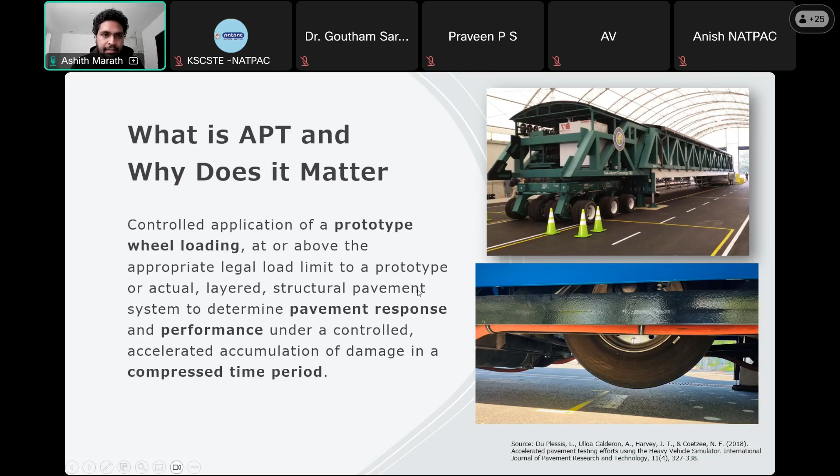Why does APT matter? The main advantage of using APT is to validate new materials or designs before recommending them for widespread use, and to help understand why certain pavements fail prematurely, and improve specifications and construction practices. I included construction practices because doing APT facilities requires going through all the steps of constructing a typical highway or pavement section, including plant production. That helped us, especially in my experience, identify challenges in plant production, especially when using new materials. That was really a helpful process that comes as part of the APT testing plan.

And finally, an APT facility lets us understand the pavement's mechanical behavior, and eventually improve the pavement prediction models.

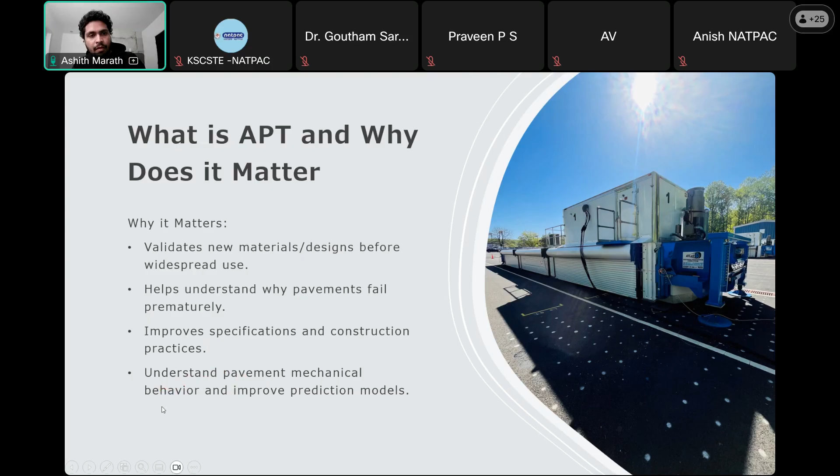So now I'll go through each of the features I mentioned, one by one. First, let's move to understanding the role of APT in understanding pavement mechanics.

At the Turner-Fairbank Research Center, one of our main focuses is to evaluate pavement mechanics with the help of multiple kinds of sensors embedded in the pavement. In our case, we have 11 test sections, each with 4 different test sites, so combined there are 44 test sites. All 11 lanes are embedded with almost 300 to 350 sensors, including pressure cells and strain gauges. I'll explain that in the coming slide.

With all these responses from these sensors, we are trying to capture the variation in stresses and strains under different wheel loading and configurations, pavement temperature, wheel load, pressure, and speed, all these different configurations.

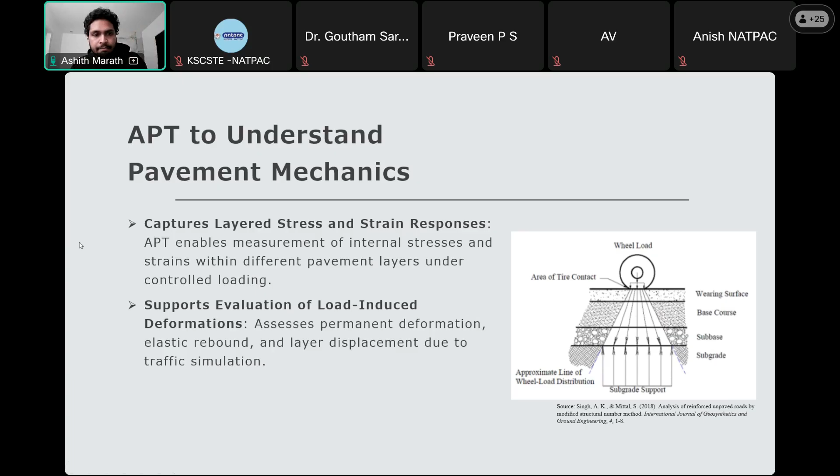This also supports evaluation of load-induced deformations, especially in understanding or measuring the progress of rutting or cracking phenomena. So we continuously evaluate that to understand how cracking or rutting is propagating in the pavements, enabling monitoring of fatigue and rutting mechanisms.

This is one of the main ideas of our current project: to investigate the propagation, mainly focusing on fatigue cracking propagation, looking at the initiation and different stages of the cracking.

This APT facility also facilitates validation of structural response models. For mechanistic-empirical pavement design in the US, we use linear elastic analysis as the basic pavement response model, except for some design software such as ILLI-PAVE and FlexPAVE. Pavement ME, which is the most widely used software, uses linear elastic analysis. So we use our recorded pavement responses to validate these linear elastic or finite element analyses, to validate the prediction accuracy of these models.

I've shown a small example from one of our test results, one of our sensor results. Out of 11 test lanes, two of them are inverted pavements. For those not familiar, an inverted pavement is basically a conventional asphalt pavement structure with a sub-base layer constituted of a cement treated base.

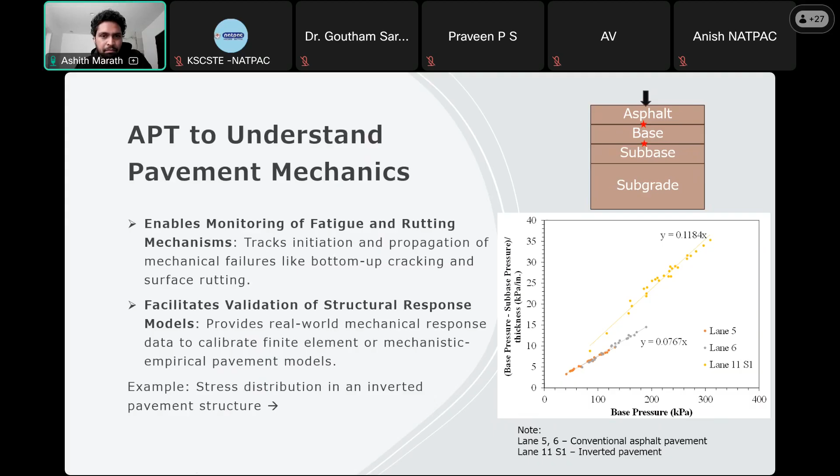Moving on further, another application of the APT is to calibrate pavement design models, mainly for the PMED. PMED stands for Pavement Mechanistic Empirical Design. The general process I will classify as 5 steps. First one is to run APT tests on instrumented sections.

Second step is to characterize materials in the lab. Third step is to use mechanistic empirical software such as CalME, MEPDG via AASHTOWare to predict performance using lab data and compare predictions to APT measurements such as rutting, cracking, deflection and strains, and adjust the model calibration factors—that is, the transfer function—until prediction matches the measurements.

For example, the California DOT has developed their own rutting and fatigue models which are more suitable for the California region. I'll talk a little bit about transfer functions, for those who are not familiar with what those functions are.

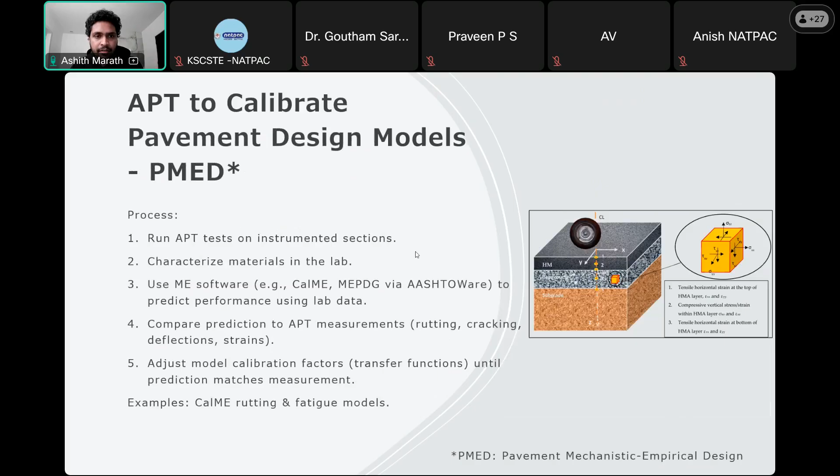This is a very simple, basic structure of the pavement mechanistic empirical pavement design. These are the steps: first you characterize the pavement materials in the lab. By characterization, I mean measuring the mechanical properties of the mixture—not necessarily index tests such as IDEAL-CT, which are index-based tests. Instead, one example is the dynamic modulus, which is a fundamental property of an asphalt mixture widely used in the pavement mechanistic empirical design approach.

Once you characterize the materials, you use a pavement response model, which could be linear elastic analysis. In India, we use IITPave, which runs on a linear elastic analysis program. It could also be a finite element analysis program. The output from the pavement response model is the stresses and strains within the pavement structure. As pavement engineers, we focus on critical locations—the strain at the bottom of the asphalt layer, and the vertical strain at the surface of the subgrade layer.

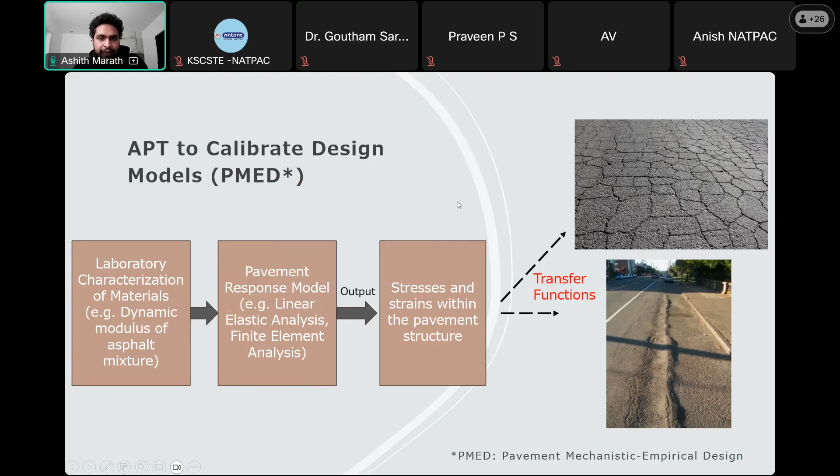This part of the PMED is the empirical part, while the response model and determination of stresses and strains is the mechanistic part of the design. With that in mind, let's move on to another application of APT, which is to develop correlation between index-based tests and pavement performance.

The APT correlates lab index properties to in-situ behavior. It uses APT to evaluate how index tests reflect the mechanical performance of subgrade, base, and surface layers, and enhances the reliability of material selection—confirming whether lab tested parameters like CBR or resilient modulus align with field responses under loading.

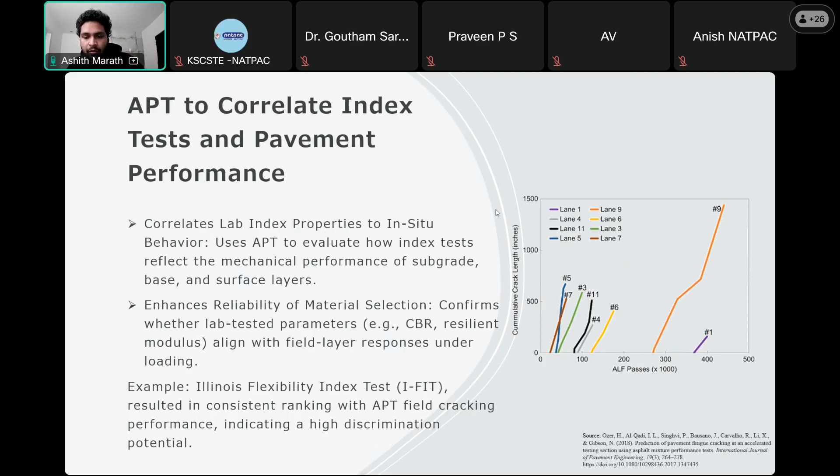This test section has a rotating arm-like structure with adjustable radii of the wing, so they can load different lanes simultaneously. These kinds of facilities are more useful when a higher speed of loading is required.

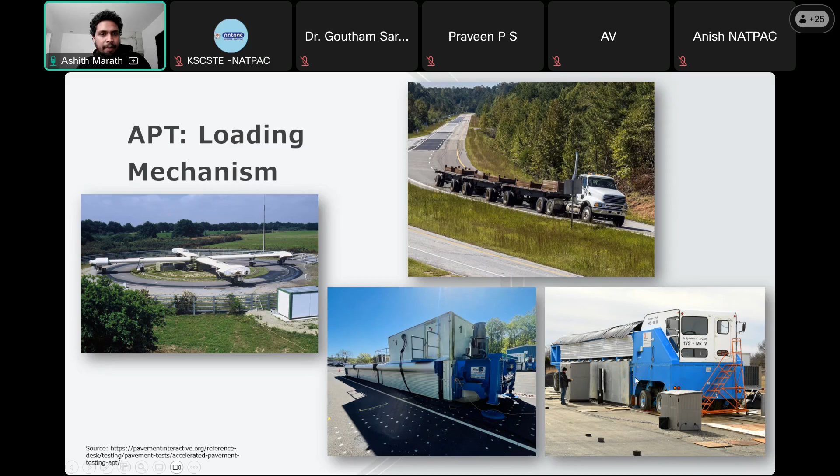I'll move on to another important aspect of an APT facility: the instrumentation of pavement layers. Most APT facilities don't give much attention to the installation of sensors in the pavement, but in my understanding, this is one of the most critical steps during APT construction. The reason is that once you install these strain gauges or sensors, there is very little chance you can make corrective actions to those installations. So you need to be very careful when doing the installation of the sensors.

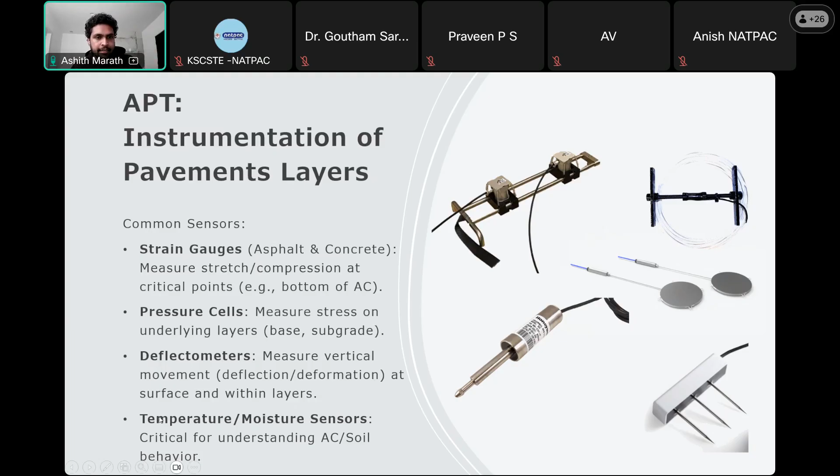With that being said, I will move on to APT distress detection. You might be familiar with the NSV vehicle, the network survey vehicles, used in - I think there are some projects in India as well that use NSVs. But in our facility, we don't use a full scale NSV. Instead, we use a small cart which has a single unit of laser sensor attached to a computer component and power supply.

These small carts we use to do laser scanning of the pavement, which gives a 3D image of the pavement surface. This is further processed to detect cracks and other distresses, including rutting and macro texture of the pavement surface.

Earlier we used to do visual mapping for the cracking. We used to go to the field, put a transparent sheet over the test sections, and mark it manually every time, at every interval of specific passes of the HVS.

Now we have moved on to automated imaging. The HVS itself has a camera system which captures images of the pavement, and using a neural network model such as YOLO, these images are processed to detect cracks over the pavement structure. One drawback of that system is that we cannot detect the depth of the crack using such 2D image sensing.

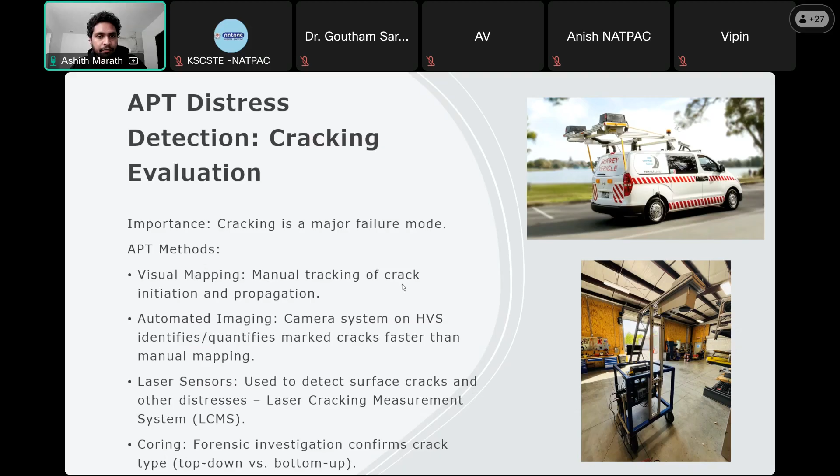And finally, at the end of the loading process, we do forensic evaluation, which is very typical in all the facilities. We take the core across the crack and determine what kind of cracks and what is the depth of these cracks. So with that, I'll move on to the rutting evaluation.

So that is the way we measure the rutting of the pavement, and it is very much accurate. We could get an accuracy in millimeters with this kind of sensor. The main analysis with the rutting value from the laser profilometer is to plot it against the number of wheel passes, to see the propagation rate and what are the different phases of rutting propagation.

We also try to separate the rutting. As you know, rutting could happen from two cases: one is rutting occurring in the subgrade layer or other unbound layers, and also rutting happening due to densification of the asphalt layer. So we try to separate it by using survey markers.

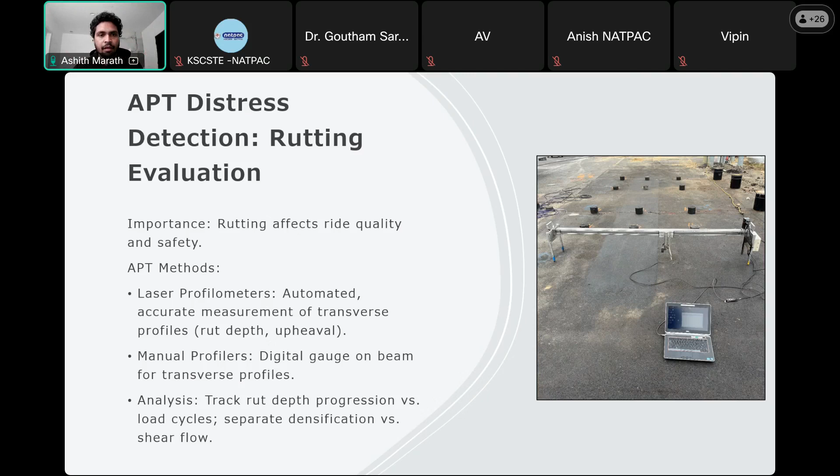The main advantage of this new version is that it is much faster than the previous one, because it avoids the continuous follow-up hits of individual loading. Once you load the pavement, the machine captures the load at the same time it hits the pavement and comes back. It will not have multiple impacts at a single drop, which reduces a huge amount of testing time and makes it very fast.

We recently upgraded this, so this is called the fast FWD. We also have an LWD device that we use to test our pavements. The reason is that it is very fast, and we can do the LWD testing under the HVS machines. To do FWD testing, we need to move the machine sideways, and that takes too much work hours.

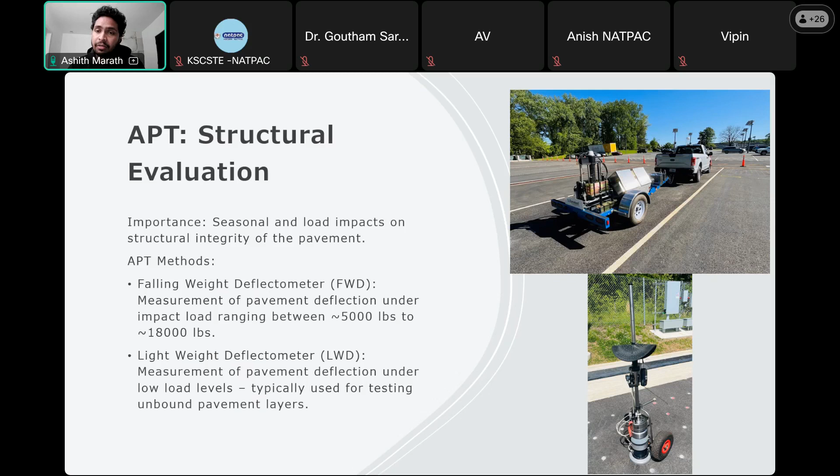Because of that, we still continue to use the LWD testing. LWD testing is typically used for unbound pavement layers, but in our facility, we still use it over the asphalt pavement surface as well.

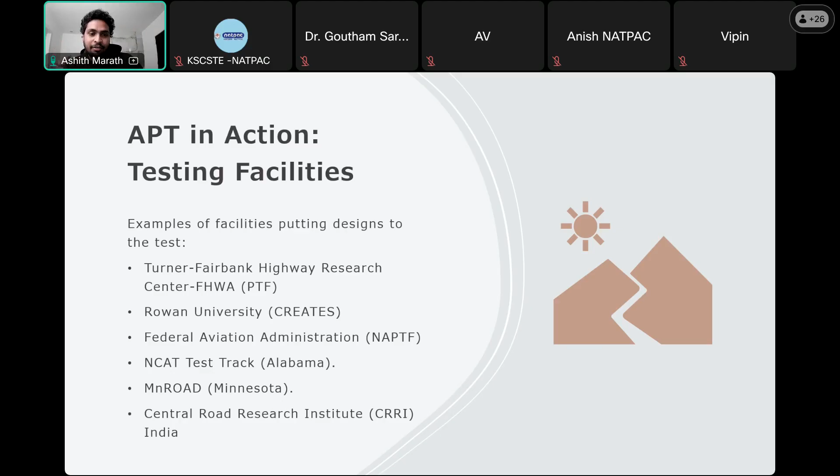I have listed some of the well-known APT testing facilities across the globe. The first is Turner-Fairbank, where I currently work, and Rowan University. The Federal Aviation Administration also has a test facility in Atlantic City, USA, and there's the NCAT test track. You've already seen a couple of images I presented. Minnesota DOT also has an APT facility which mainly focuses on concrete pavements. And in India we have CRRI, though I'm not sure how well the research is going there with HVS - you guys may know better than me.

Moving on to the APT performance results, the idea is to show some of the impacts of APT - how different APT facilities have used it to get meaningful results. Focusing on rutting, the goal was to find lab tests that reliably predict field rutting conditions.

This test was conducted by NCAT, and their findings were that dynamic creep was a poor predictor - it couldn't rank mixes with different gradations correctly and didn't predict the low void mix failures. They also found that wheel tracking tests, such as the Hamburg wheel and APA tests, correlated well with the field rutting values. They tried to use APT to distinguish between two different materials, the GTR material and the SBS material, which is a polymer for binder modification.

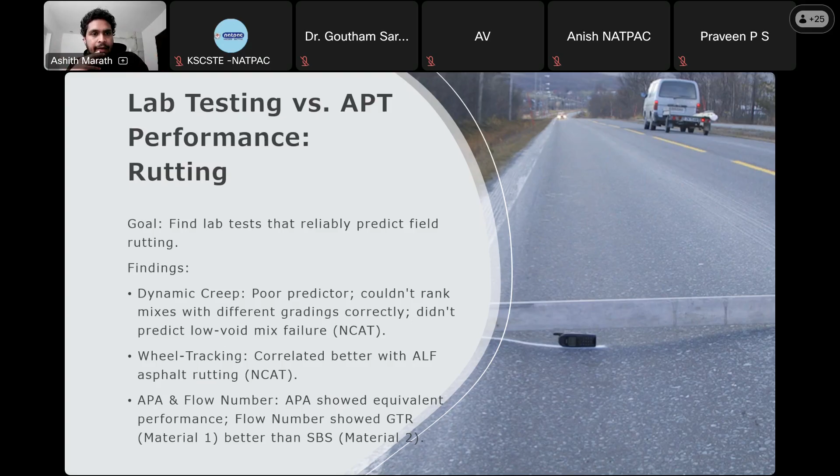Coming to cracking performance, in one of our previous tests at Turner-Fairbank, we tried to correlate the binder property G star sin delta with fatigue cracking performance, and found that G star sin delta was a poor predictor for cracking performance. We also found that the CTOD parameter test showed the strongest correlation with APT fatigue results, and the binder yield energy was also promising.

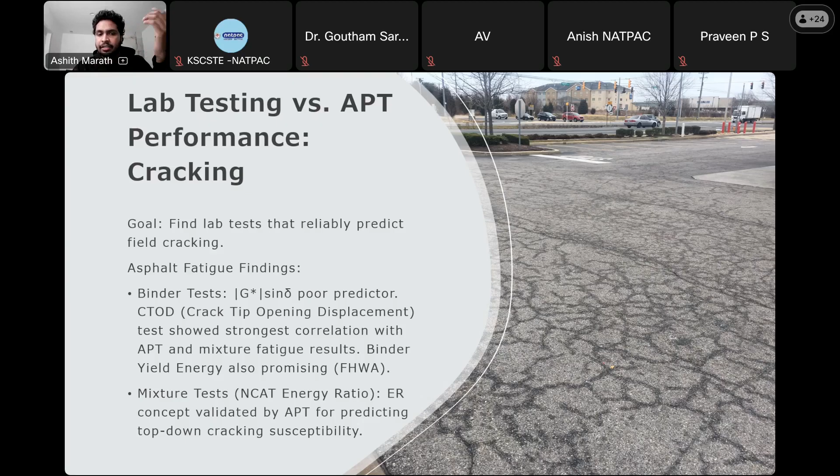Again, in the NCAT mixture test, they evaluated the energy ratio concept, which was validated using the APT facility to predict the top-down cracking susceptibility of pavements.

Another application by the NCAT test track is using their APT facility to demonstrate high RAP mixture performance. They demonstrated good performance with 45 to 50% RAP usage in the mixes. They also used APT with warm mix asphalt pavements and showed comparable performance to hot mix asphalt, leading to state approvals. They also validated Stone Matrix Asphalt, which allowed the use of local aggregates like crushed gravel for widespread use in the state.

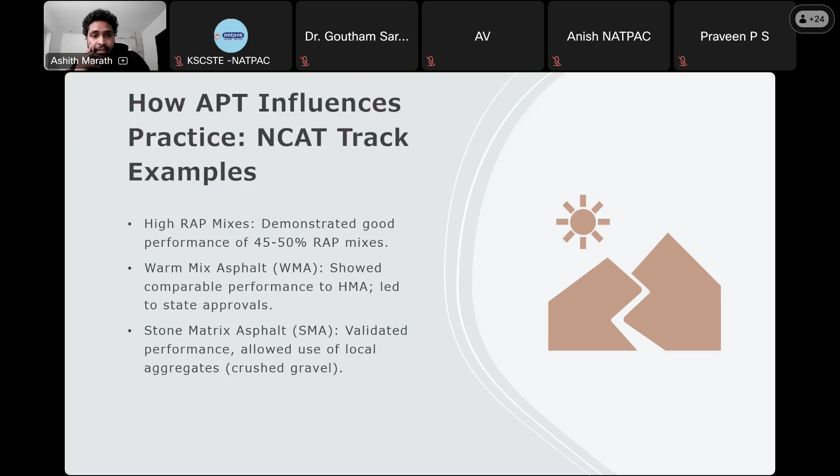The Florida DOT has done some interesting studies with their APT. They tried using different polymer modified binders in the pavement to optimize placement depth, and also evaluated PG 82-22 binder, investigating stiffer binders for high stress areas like intersections.

Instead of focusing on the pavement material side, they also tried different tire configurations, evaluating wide base tires versus dual tire assemblies. Wide base tires are kind of replacing dual wheel assemblies because of lesser wheel weight while carrying almost the same load. They evaluated the impact of wide base tires and found it had similar impact to that of the dual wheel assembly.

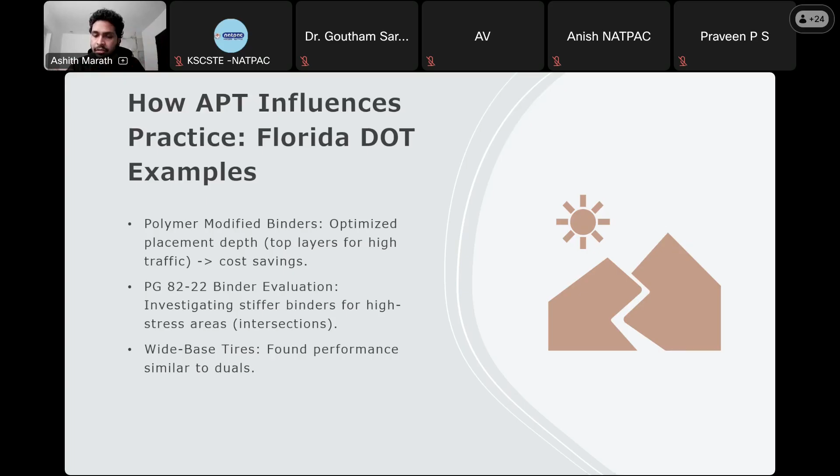With these aspects of the APT facility covered, I will now go through one of my case studies, which is basically my PhD dissertation, with APT as one of its major components. The title of the study was a demonstration of electrically conductive asphalt pavements for de-icing applications in cold regions. It was conducted at our APT facility at Rowan University, and the project was funded by ERDC, which is an R&D division of the US Army Corps of Engineers.

So now I will go through the background of the study and objectives. As I said, this is a very niche area, not applicable for all full length highways.

The motivation behind the US Army Corps for this project was to implement this for their airstrips in cold regions, extremely cold regions, not for highway applications.

The current practice of snow and ice removal from the surface is the use of de-icing salts and chemical de-icers or mechanical plowing. Here in the US, if you've visited in the winter, you could understand this: the accumulation of snow is a major issue, and the government spends a lot of money maintaining the pavement surface clear during winter season. So it's a major issue here.

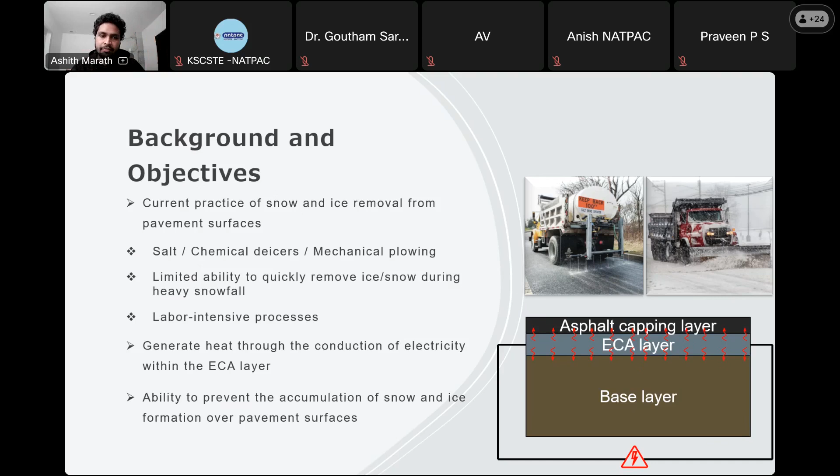With that, the laboratory phase - I included a single slide for the laboratory phase of the study, which is basically to develop the ECA mixture, electrically conductive mixture. The components of the mixture are the typical components such as asphalt binder, coarse aggregate, fine aggregates, and conductive additives. The conductive additives give the property of electrical conductivity to the materials.

In my study, I used graphite and carbon fibers as the conductive additives. So if you look at this, you have two types of conductive additives: carbon fibers in the fibrous form and graphite in the powder form. The reason to use these two different kinds is to balance the mechanical and electrical performance of the mixtures.

As you add more and more graphite into the mixture, it will start losing the cracking performance of the mixture. In order to compensate that, we had to use certain doses of carbon fibers so as to reach a balance between the mechanical and electrical performance of the mixture.

In the lab, on the right side, you see how you measure the electrical conductivity of the asphalt mixtures using a multimeter. Once the resistance of the mix is determined, using the equations, we estimate the resistivity of the material.

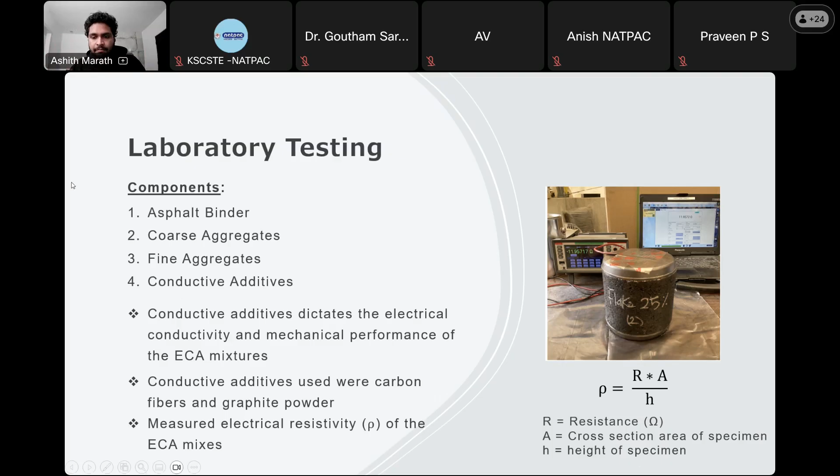With that, once we determine the electrical conductivity of the asphalt mixture, we moved on to the design phase of the pavement, full scale pavement. I used finite element modeling, which is only on the thermal side, not the mechanical analysis. So I developed a thermal model for the de-icing pavement, which can predict the pavement temperature under different ambient conditions.

As you can see in this image, this is from the test section constructed at Rowan University, and you can see the steel bars placed in the transverse direction. These steel bars are a main component of electrically conductive pavements, which provides the electrical potential difference to the conductive layer.

The electrically conductive asphalt mixture will be placed right over this network of steel bars, and the electrical power supply will be connected to one end of the steel bar network, so that it provides the electrical potential difference. Using the finite element modeling, I came up with a design chart for determining how much heat power output is required during different ambient temperature conditions, and using the required power output, what the electrode spacing should be. I call these steel bars electrodes. So, what the electrode spacing is and what the thickness of the conductive layer should be for the ECA pavement.

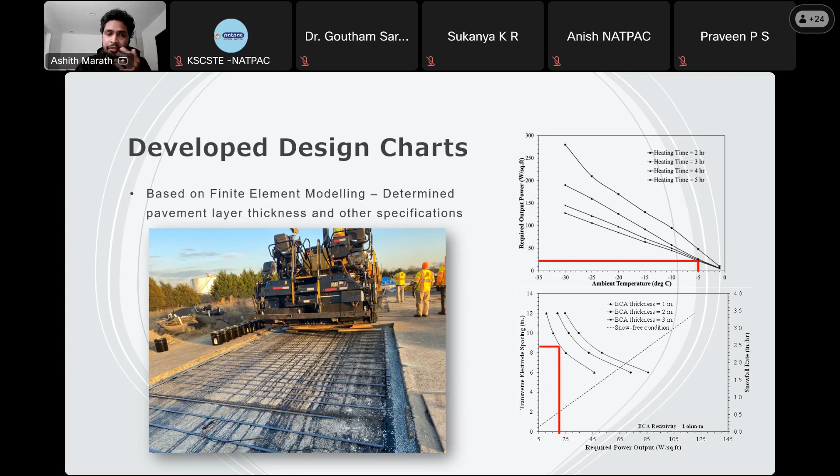With that design charts, we designed the pavements and constructed test sections in our APT facility at Rowan University. And these are some of the images from our plant production of the electrically conductive asphalt mixtures.

As I said in the initial slides, one of the main advantages of the APT is you can also determine the production challenges. This was very insightful for us. On the left side image, you can see the mixing of the graphite and carbon fibers into the aggregates, and we tried to mix it in plant.

You can see the kind of blending of this carbon fiber and graphite. Everything was fine at this stage of production, but once we arrived at the mixing stage, we saw a lot of loss of conductive additives at the conveyor belt because of the presence of the graphite. The graphite has to stick on the surface of the conveyor belt, but it was sliding. The conductive finer portion of the mix was sliding downwards and was not carried upwards by the conveyor belt. This resulted in a high reduction in the electrical conductivity of the mixtures.

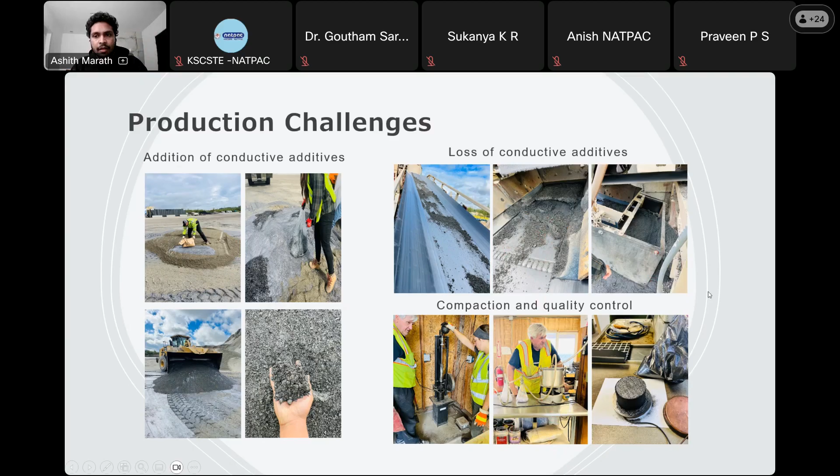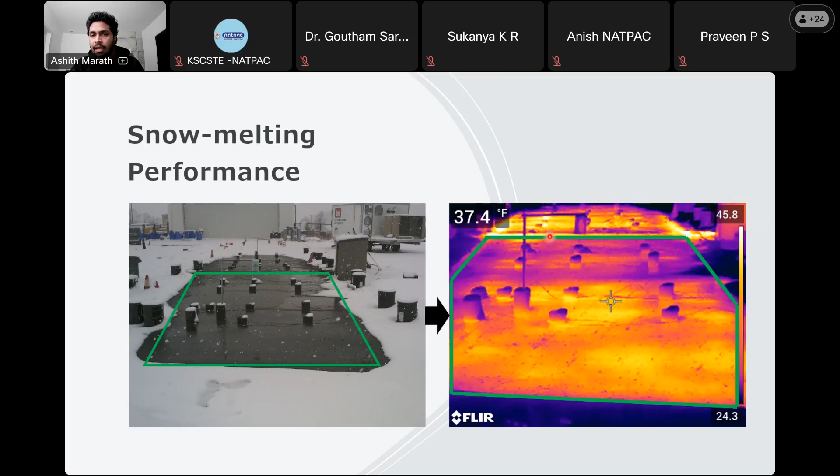So as we evaluated the de-icing performance of the pavements, we moved on to the mechanical performance evaluation of the test strips. There we used our HVS machine, and for loading the HVS machine we had a target load of 40 kilonewton, which is typical for truck loading, and tire pressure of 100 psi.

We had embedded sensors in the pavement, asphalt strain gauges and pressure cells. It was a bi-directional loading mode, meaning the load will be applied in both the forward and backward direction of the wheel movement, and there was a wander applied. This is another feature of the HVS - it has the feature to do the wandering.

You can give any distribution to that, like uniform distribution across 8 inches, or normal distribution across 8 inches. For this specific project we applied a normal distribution across 8 inches of wandering. The temperature was fixed at 50 degrees Celsius, and there were insulation covers on both sides of the machine so you can maintain a pretty accurate temperature inside the machine as well as the surface of the pavement. The target number of passes was 300,000 passes.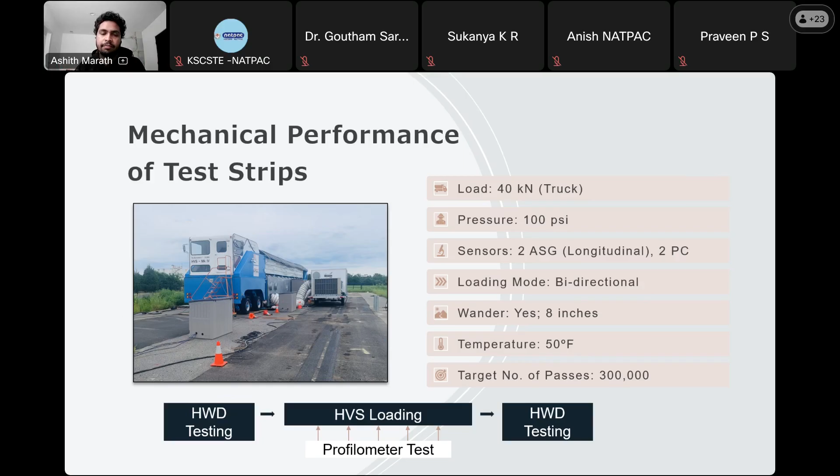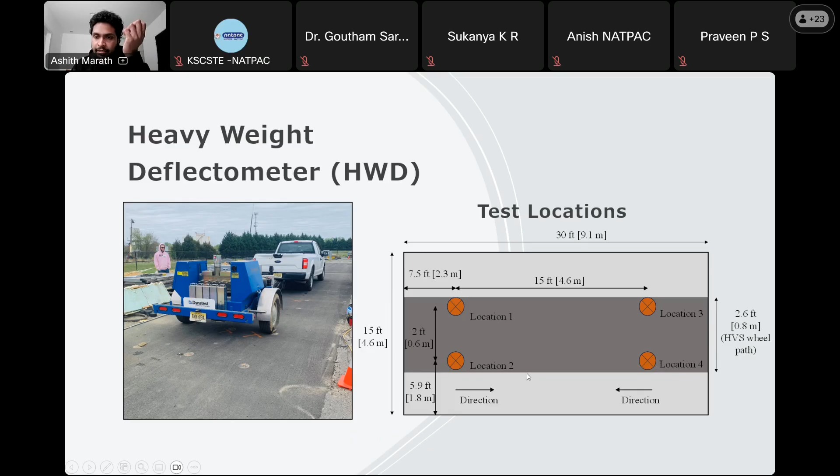The figure shows the HWD device in Rowan University, and these are the locations. We selected 3 to 4 locations within the wheel path area, and we compared the pavement deflection.

As you can see here, there are 2 different colors. The red color indicates the HWD deflections after loading. The blue color lines indicate the before-loading conditions.

We compared the deflection results to evaluate the pavement performance or structural integrity as the HVS progressed. The overall summary from the HWD analysis was that all the ECA-conductive pavement sections were either comparable to the conventional pavement or better than the conventional pavement performance.

We didn't do a back calculation analysis using the HWD deflection. The reason was that it had a PCC slab below the pavement layers, below the asphalt layer. Because of that, it is kind of a composite pavement, right? So the back calculation process is going to be really hectic.

We cannot rely on the results of back-calculated modulus in that case, so we didn't go to that level of analysis. We stuck with the deflection analysis and also the deflection bowl parameters as well.

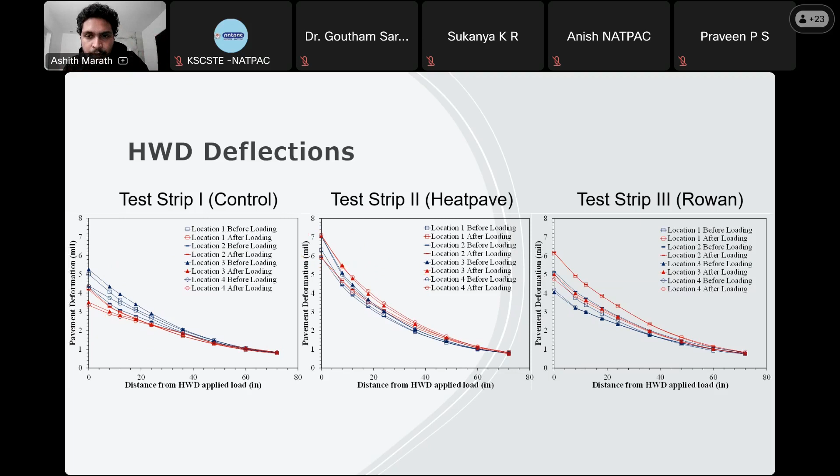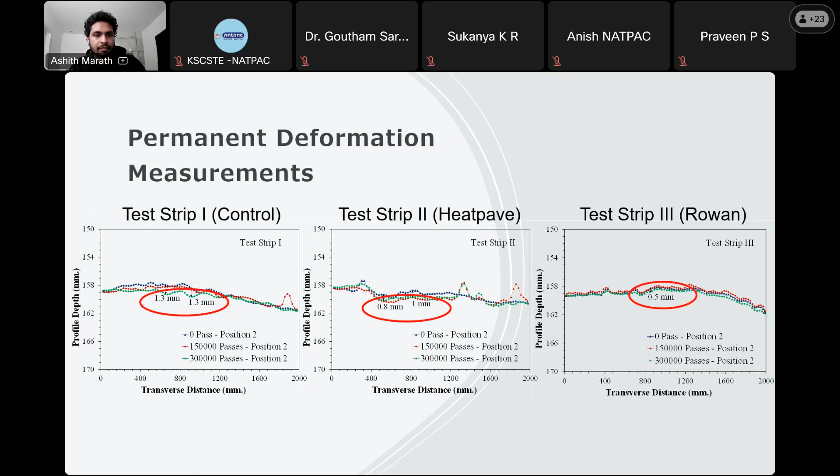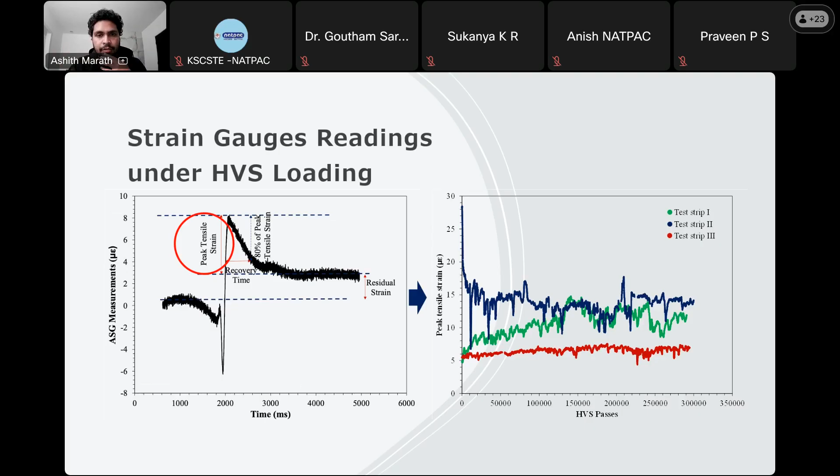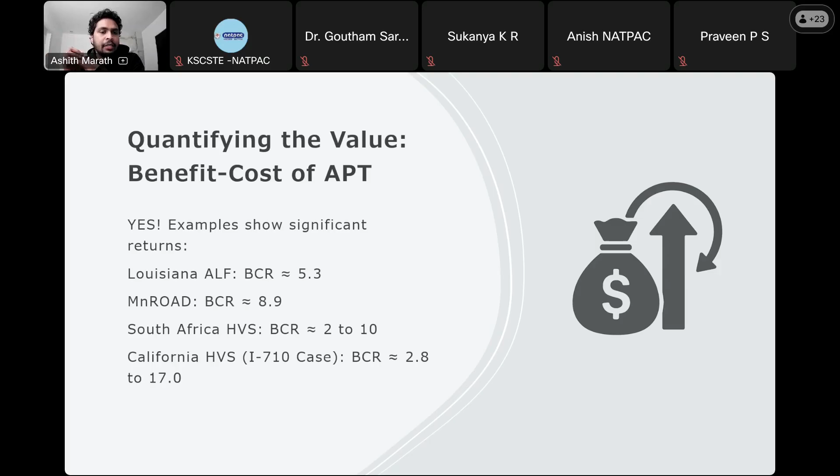As you can see here, Louisiana, Minnesota, South Africa, or the California DOTs, all of them have reported a BCR value higher than 1, which indicates good feasibility. So with that, I'm going to summarize my slides.

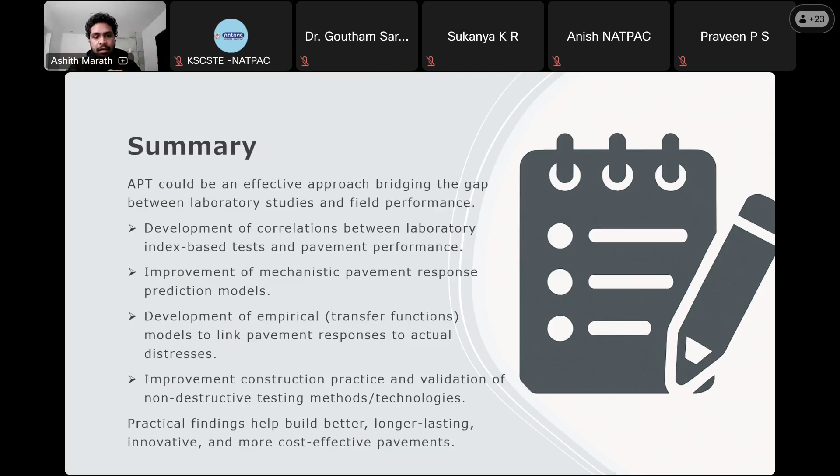So that's all I have for today. Feel free to ask any questions, and if any in-depth details are required, feel free to contact me at the given email ID. I'm open for questions.

That was an informative session. Thank you, sir. Now the forum is open for discussion.

However, he has mentioned a few questions actually. Maybe I'll put them in the chat box also. Shall I read it out? Yes. Let me try to open the chat box. Okay, all right. So there are seven questions. Yeah, right, sure. All right, yeah, I will go through them one by one.